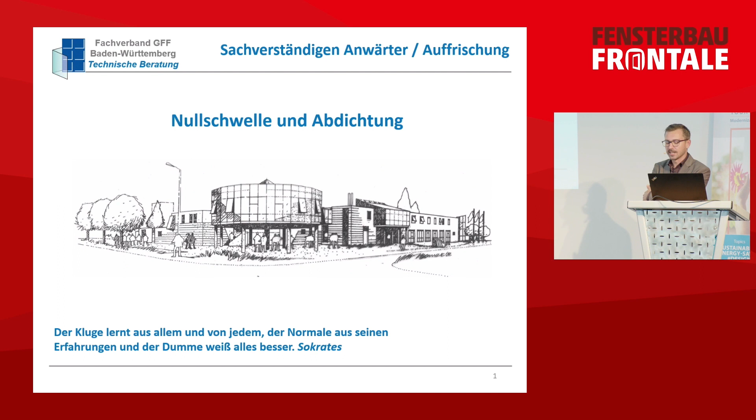And of course that is sort of contradictory. Over the next 30 minutes I would like to tell you about the sets of rules and regulations that do exist. I also have to tell you the topic is very complex. It's difficult to find an overview of, partly because we have lots of partial requirements and exceptions to these rules, and also because since we have different laws in different states, we also have state-specific rules and regulations.

So I'm going to look at everything from the standpoint of Baden-Württemberg, and it's mainly about you knowing what it is - requests where you're going to have to take out your doors and replace them with new ones, or also concerns on the part of selling.

Okay, so it's not about what makes sense technically, but only what's required. And of course there are solutions that are also technical. On top of that, being barrier-free also mainly depends on how the building is being used - if it's a single family home, a multifamily home, a public building - and also on where the building is located, and which direction the door is going in.

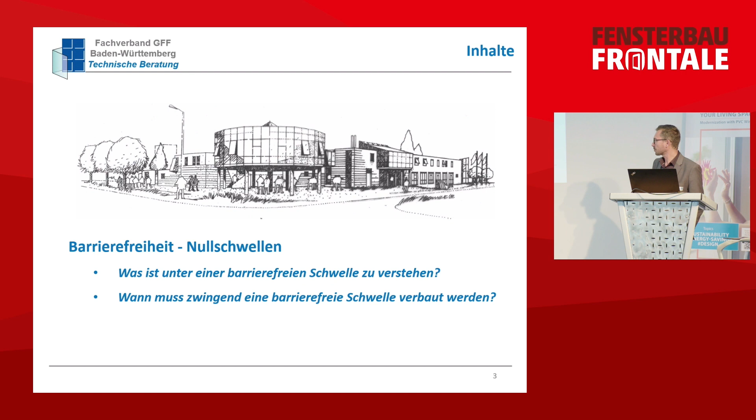Now it works, okay. So we're going to get started with barrier-free. It's really about the basic question: what is a barrier-free threshold? And the second question would be: when do you have to have a barrier-free threshold? That's not easy to determine. And the question would be, what is that even? That's still pretty easy to answer because there's a definition, there's a norm for that.

That's the 18040, in part one, which covers the public sector, and part two would be for private homes. And this is how it's defined: thresholds aren't applicable if they are needed, they can't be higher than 2 centimeters. And of course we know those 2 centimeters in height - they've been used for decades and sold as being barrier-free.

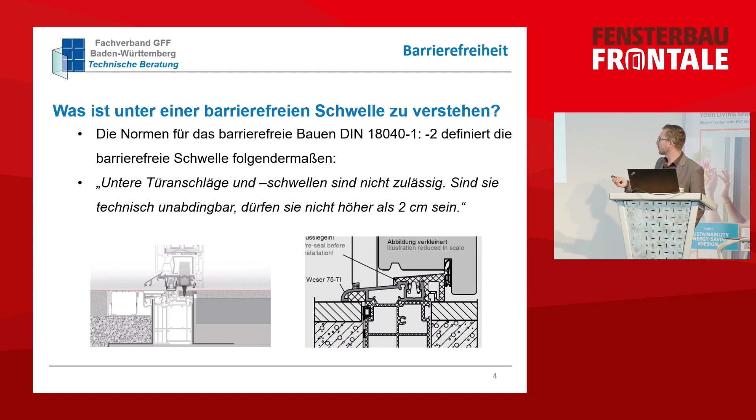And of course that is a system solution, a zero solution. Now the question is, what does that mean technically - needed and necessary? That was also clarified via the ministry in Baden-Württemberg. They're saying overall that 'needed' means that there can't be any technical system available in the market. So if there's a solution for it, then it's not technically needed.

And of course there are solutions for it. That's why in these systems, specifically if you're planning a new building, there are really no ways around it - you have to be barrier-free in this sector. And of course we're also going to talk about the exceptions that I already mentioned in the beginning.

So this is where you can see it - this is an overview, this is what it looks like. So we have barrier-free building, and there are some norms that define it. They've been introduced legally for public buildings, and part two would be for private homes. And then we also have a differentiation for new buildings and also for renovations.

That would be the same for private homes, and in the norm itself there are also different sets of rules and different language being used for when you have to build in a barrier-free way. In the public sector, if it's a new building, you have to build in a barrier-free way - when it comes to buildings it's also mandatory. And when it comes to remodeling in the public sector, and when it comes to private homes, it's a recommendation - the official recommendation.

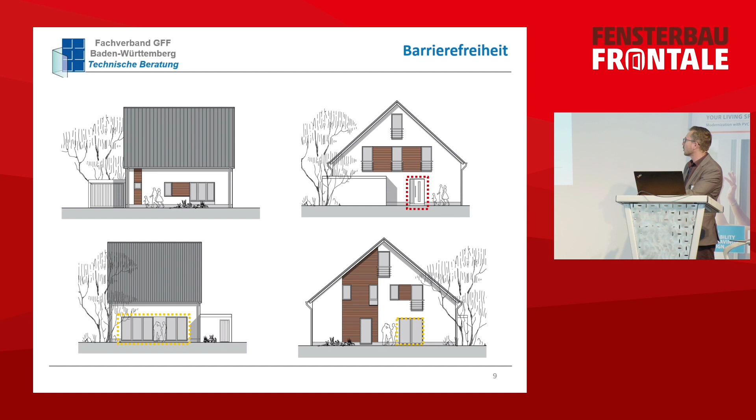So let's look at all of that using a building. This is just a classic single family home with a front door and a terrace door. And if we now look at the overview, we see our front door in red, and then also the terrace door. In a single family home, we have standard requirements, and what we do have to take care of is that you have to contractually set the 18040. So if it's in there, it's just included.

One thing that can happen - it could be the multifamily sector.

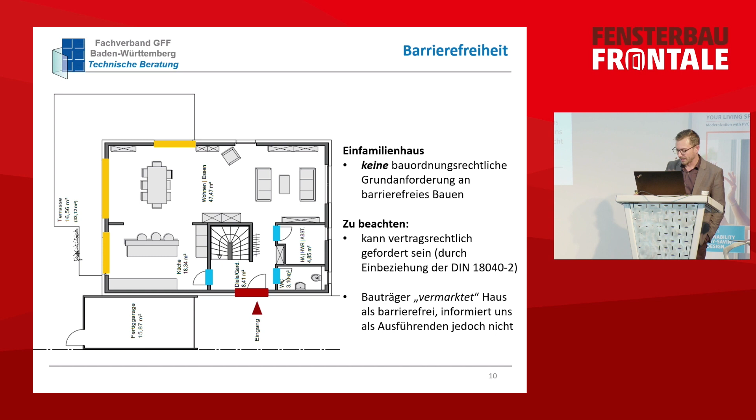So if the apartment is marketed as being barrier-free, but it's really not, then that could be a problem, and there's friction that can happen here. If I compare that with a multifamily home, I have a very similar situation. I have the front door shown here, the terrace door, and also the balcony doors. We also have a multifamily home starting at 3 living units. I have more than 3 specifically, and the front door needs to be barrier-free, and then on one level apartments need to be barrier-free, and then also partially usable as barrier-free. Again, it can also be fully barrier-free, and that can be set as a contract, or we're going to run into the same problem I just talked about.

So when it comes to this standard solution, the balcony or terrace door are not included, so you can use classic thresholds if you want to.

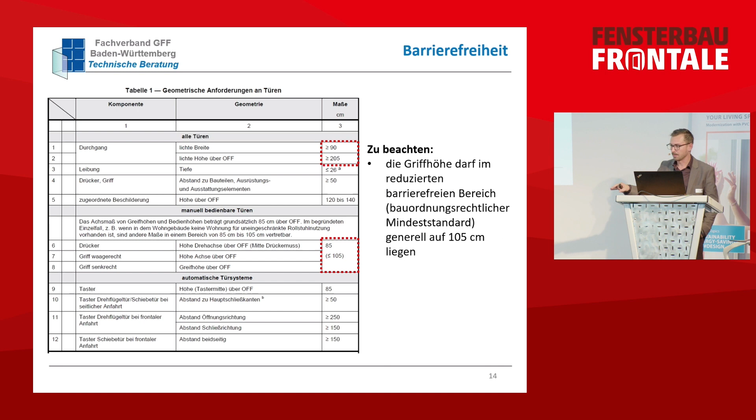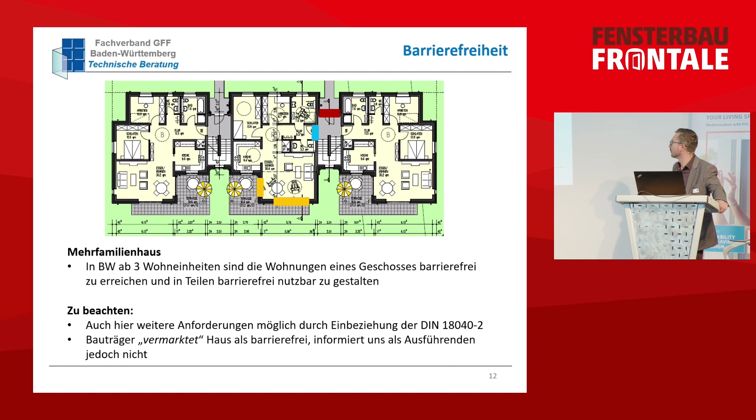Another exception would be the specific width that you need, so for example 90 and then 205. As a standard, handles have to be at 85 centimeters in order to be barrier-free. This minimum standard requirement in line with this law can also be 105. So when it comes to this front door, if you have a clicker, for example, then it doesn't apply, so it can be at 105. So it would mainly be the front door.

So if we now look at the sector that is not private homes, so public buildings instead, then I have paragraph 39. Again, that applies, and I have what is being used here by old people, so there are no exceptions, and again it's fully barrier-free. And I have things like special schools for disabled children, people with disabilities.

What's problematic would be public buildings, because in this case you just have a lot of exceptions, and that is really everything else basically in terms of what we have. So public buildings, the mayor's office, things like that, churches as well, museums, etc. And that means we don't have a situation where the whole building has to be barrier-free, but really just the main part, and I'm going to explain what that means.

So this is an example. For example, you can see a church from my home city. This entrance is not barrier-free. However, this makes sense because back here on the side, there's a ramp going up, and you can just use the side door if you are disabled.

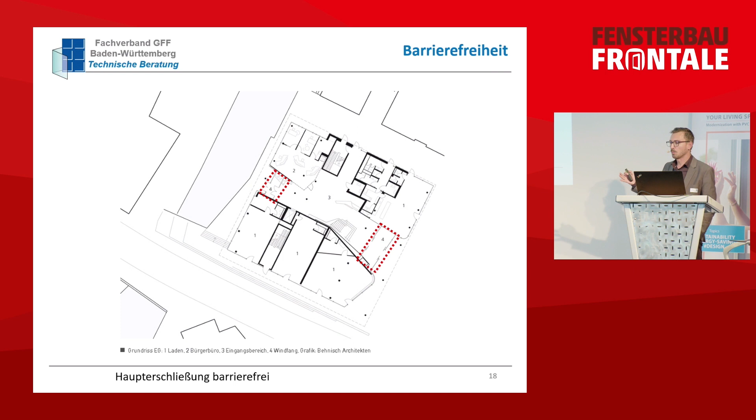So again, the main part has to be barrier-free, so the doors have to be barrier-free, so that way all citizens can access the building. That doesn't mean the whole building has to be barrier-free. It just means the top levels can then be not barrier-free, because if they only have to go there for the public sector, that needs to be barrier-free, and where there are offices, for example, it doesn't have to be fully barrier-free.

So that is easy to remember. Doors, when it comes to public buildings, are supposed to be barrier-free, and that affects the areas where there's lots of public traffic. Of course, the same applies as when it comes to private homes, so using this norm makes it where you have higher requirements.

So this was just an overview of what's available. We have personal homes, private homes. There's the one family sector with no requirements, and then also several family homes. You just have to remember that starting at 3 living units, you have to make it where your front door is barrier-free. And if you then look at the respective doors, then a part of these ones are also barrier-free. Terrace doors, balcony doors don't have to be barrier-free unless it was agreed upon before. So those are the areas where we have to have barrier-free doors.

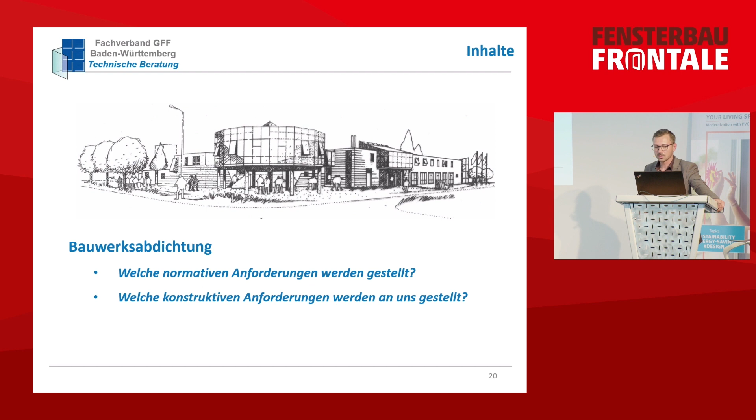So if we now look at sealing, there are two questions: what kind of normative requirements are there, and also what kind of constructive requirements are made to us window builders? Okay, so the range of norms that are relevant are 18531, that's for balconies and roofs, and 18533 for those that touch the ground, so that would be the terrace or front door. And you also know the rules for flat roofs.

So overall, they're asking for similar things. That means that you have seals for the parts that touch the ground, and also balconies and roofs. Again, the language that is being used can deviate or be different.

As a standard, those parts that touch the ground need 150 millimeters that have to be sealed. When it comes to door frames, if you can't ensure the 150, then you're going to have to take further measures. For door thresholds, you can then also use facades and/or gutters. So 150 millimeter height is the standard.

Of course, when it comes to doors, you can reduce it to 50 millimeters if you also have a water gutter that can be integrated. And if I'm still below that, for example if it's a barrier-free threshold, then it would be a special construction. In this special case, you just have to discuss it with the planner, the manufacturer of the door, the person mounting it, and also the person doing the sealing. Sounds kind of funny, but it is a special construction.

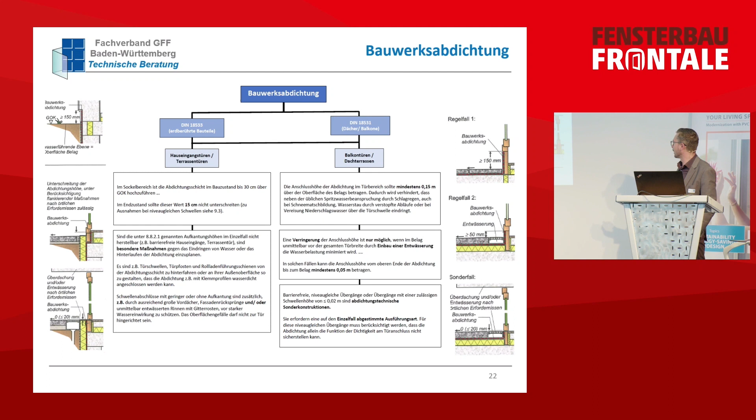So if it's doors where you actually have a walk through, then it's definitely much more difficult. It could be down to 50 with respective water gutters, and then there's usually also something like roofing.

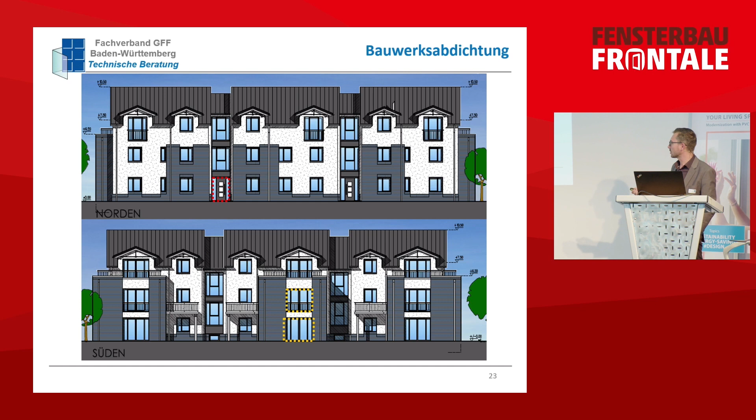Let's look at the same example. I have my front door, my terrace door, my balcony door. For doors and balcony doors, the norm requests 150, and then also drainage that's the same size as the door. So there's also a norm for the pieces that touch the ground. There are several compensation measures that can be taken, so you don't have to use drainage, but there could also be different options by having roofs over the facade, etc.

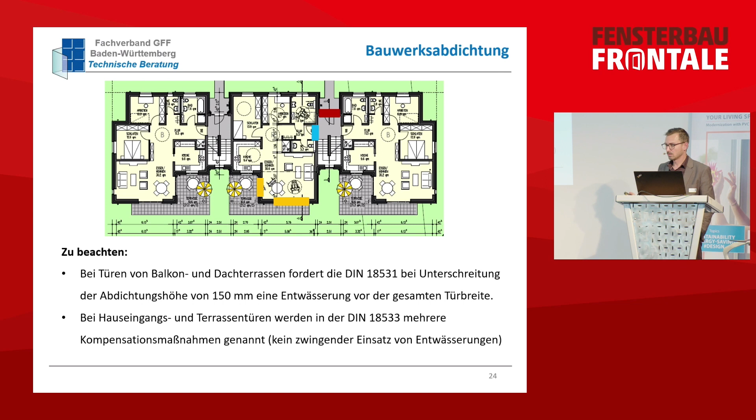While when it comes to balconies, it is a must. You have to have it.

One more thing you have to consider is the 150. That is sort of the sealing height. It's not the height of the final threshold, but really just the sealing height, and it would be the waterproofing height.

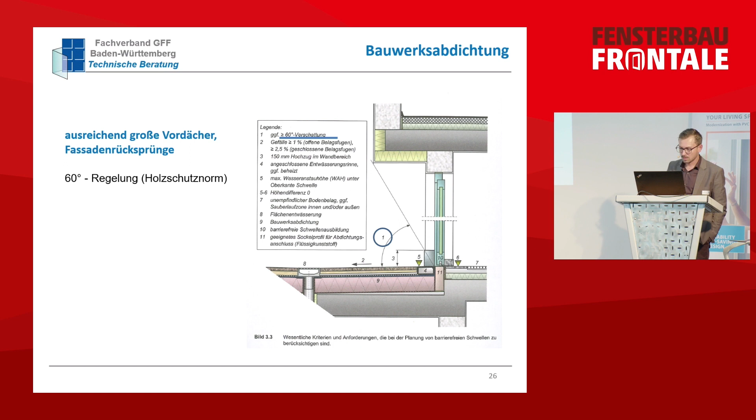This could also be a little roof. They took the 60-degree rule, so you have 60 degrees right here, and then it is supposed to be covered or protected from weather.

So what you see here is another example. This is just what it could look like as a system, and this sample shows, and technically that makes sense as well, these are materials that are going to be used that don't have any problem with water or humidity if there's anything going through the threshold. So it wouldn't be wood floors that get damaged because of that. In reality, I've seen that very rarely, or not at all to be honest, but technically it definitely makes sense.

And what you see here would be the waterproofing height, and then we're at 150 on the side up. If it's possible, that's what we do.

So we have two options. Either it could be the roller shutter guide rail, so it needs to be right next to that, that would make sense, or you're going to have the roller shutter guide rail that you can take out. Of course, that means the roller shutter guide rail was put in after the fact.

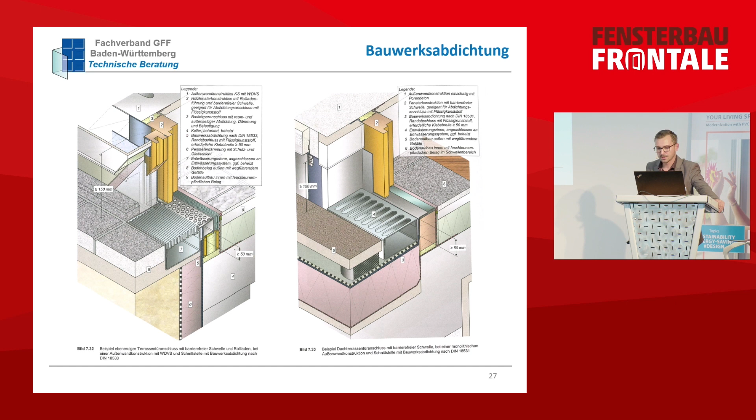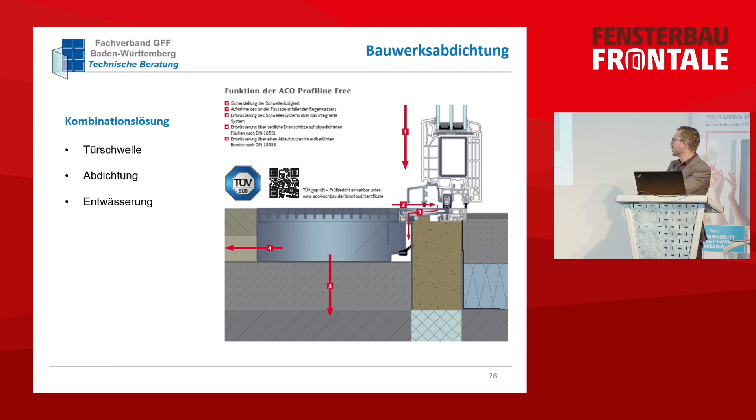So I think it could actually go there, where something like that is increasing, where you have these combi solutions, so you don't have to think about the whole system.

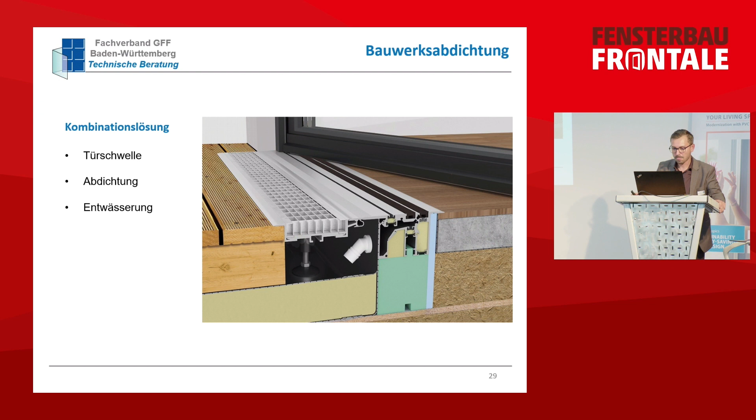So you are also familiar with this, I am sure. This is probably the lowest zero threshold. Zero would be actually zero, so even zero thresholds need some material. Because of the magnetic seal, it works very, very well, and because of that there's these two centimeter thresholds, so that's why it is definitely a lot more expensive.

Alright, so another thing that was also included, that came from the Zentralverband der Dachdecker. This is a planning help for barrier-free thresholds for roof terraces and balconies. So we have learned that this is a special solution, that's how it's described. And the question is, what kind of requirements are there?

So they have to be set up in a way where they also have drainage, and they also have to drain from the outside.

And then also the attachment when it comes to door frames is set like this. I already talked about that.

It's really about 2 different possibilities when it comes to roller shutter guide rails. Usually there are 2 different systems, so even if it is completely set in, the material is usually not good enough for the sealing portion. So either, and of course there are also wider rails, or it could also be ones that are set on top. So this is what you see here.

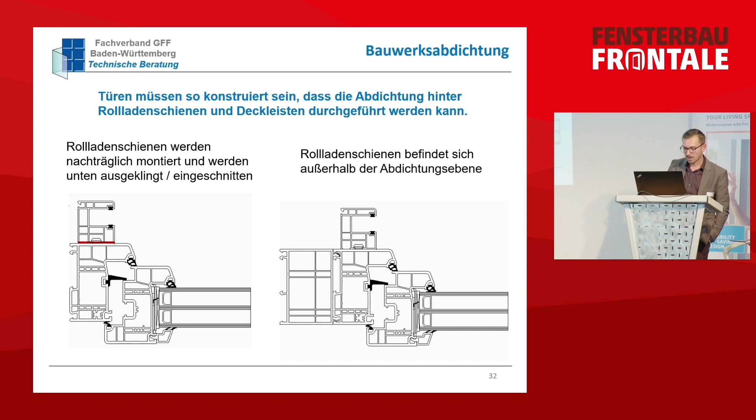There could also be this little portion at the bottom because you have the material set up from the seal, so you can just put it on there, and that means you can notch it and then put it on top. Technically that is possible, but in terms of the process it is more complicated because you have to do it after the fact. So now we're going to look at what they would want in terms of sealing.

So one thing you have to imagine is that they want a width of 5 centimeters. That means if you're in the wall opening, minimum measurement would be 5 in terms of material, and you also need 5 centimeters in your frame profile, so that you actually have everything you need, and that affects the vinyl portion. Of course, there are higher requirements of 10 centimeters for different sealing types.

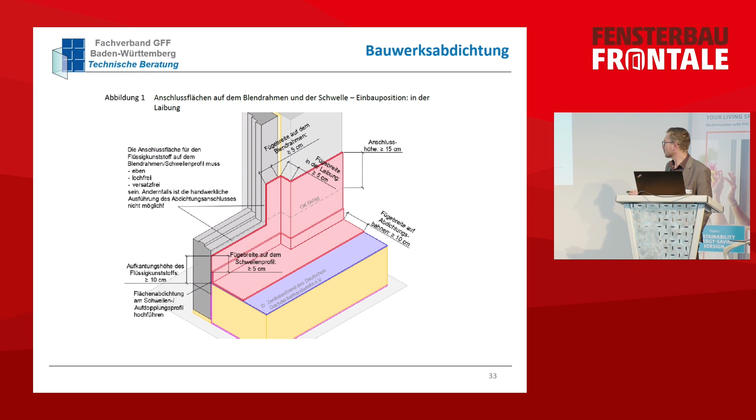Another requirement made on the part of the sealing entities was because they were worried that water is going to get stuck here and then actually get under the profile, and is then going to run after their sealing portion on the sides. So that's why they want, and that technically makes a lot of sense, they want to make it where the threshold and the underlying component is sealed as well, is waterproof as well.

So there are two solutions. Either you use a hybrid glue, there are also some pre-fixed components that you can use, and that means once it's dry, it's going to be sealed.

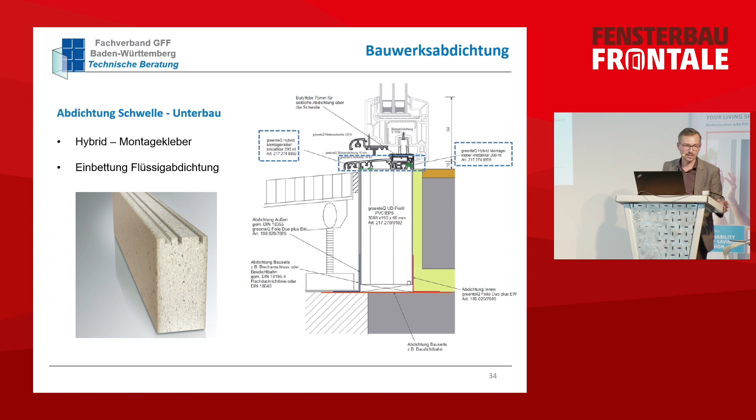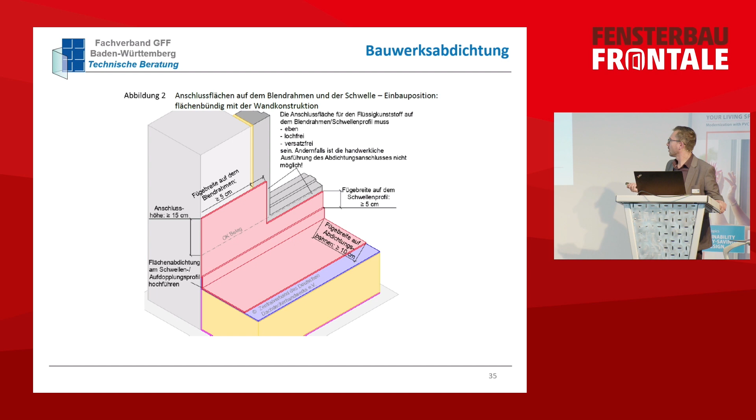So from my point of view, what they're trying to do here is, I mean, you have an assembly tolerance, so you would have to go a centimeter out or in, and then you don't actually get to the minimum requirement anymore in terms of size. It's a little bit problematic in that regard, but other than that, the requirement is the same.

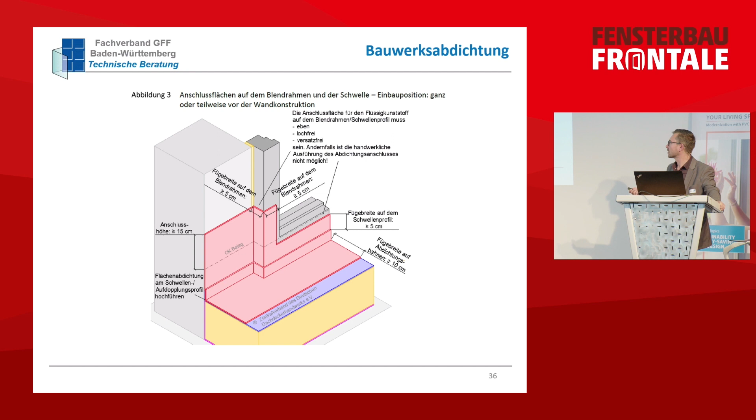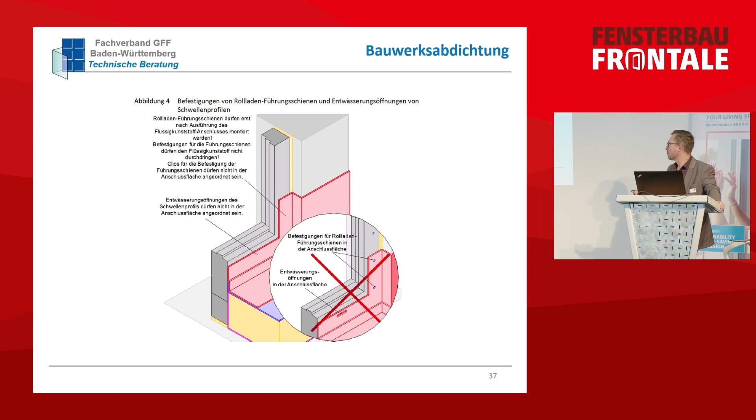So if you are higher than that, you do need the 5 centimeters again. That's the minimum requirement, and that's not in line with the tolerances that we have. So, of course, the seal can't be destroyed or shouldn't be where the drainage portion is, and later it should also not be compromised because of screws or anything like that. So that makes sense.

So this is the problem that we have to discuss with them. Does it make sense from our point of view? It's a little bit of an exaggeration. So if you have these areas, we also have the requirements right here that everything that is done here in terms of coupling is 15 centimeters on top. And that's why our area is then going to have to have these 5 centimeters being the proper width.

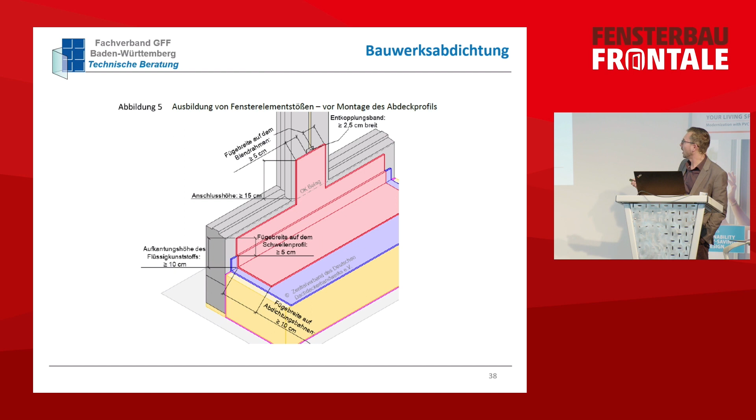And that is also something that we're going to have to discuss with them. It's true that there are some decoupling areas. This is just an example of it where it's just not completely sealed, and they also have some requirements for that, so it has to be sealed. So again, we are back at 150 millimeters.

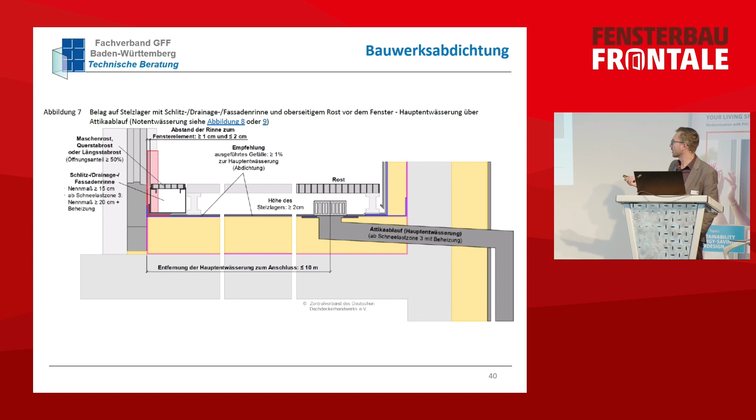The same holds true for the side. As you can see in this picture, there are different systems for drainage. So either you have an open system and then you can drain it right out. That doesn't happen very often though. And then another thing that is relevant would be the draining system that is directly attached.

And if you then have a system that is closed, you're going to need a drainage pipe just so that the water is carried out. So either it could be an open system or it could be a closed system. It needs to still get rid of the water.

So you can see that a lot of things are changing at the moment, and some things are different when it comes to it being barrier-free and sealed, but it can be solved. It can be solved by talking to each other. That's the main thing, communication.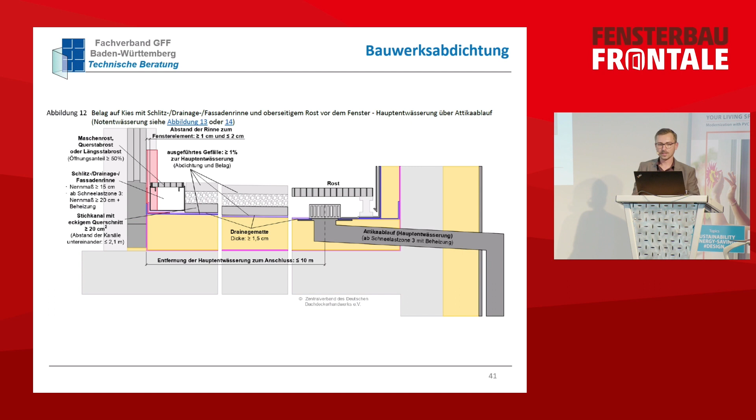Communication, if you have a planner, you need to discuss it with the planner because the planner is the person that is sort of dealing with the height level, etc. And communication with those that do the sealing. And then, of course, you also have to talk to your clients and customers directly. So communication with them is also important.

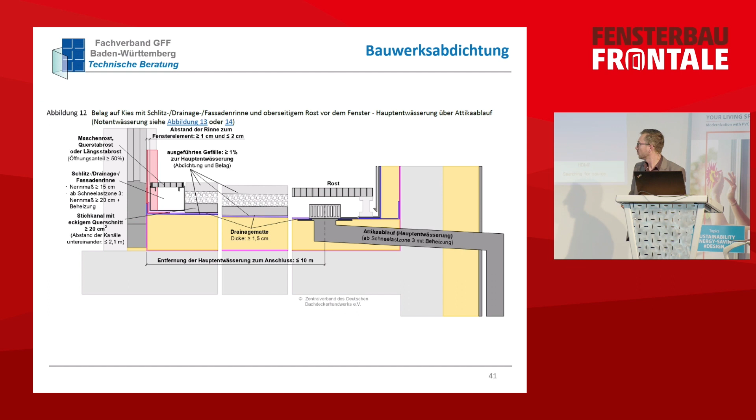What they want, usually what they want is a low setup to be able to walk through a door, and of course that makes sense as well. Best case scenario would be that there's a cooperation with a person doing the sealing just so you can offer it all together. So you just have the best solution. That would be my recommendation.